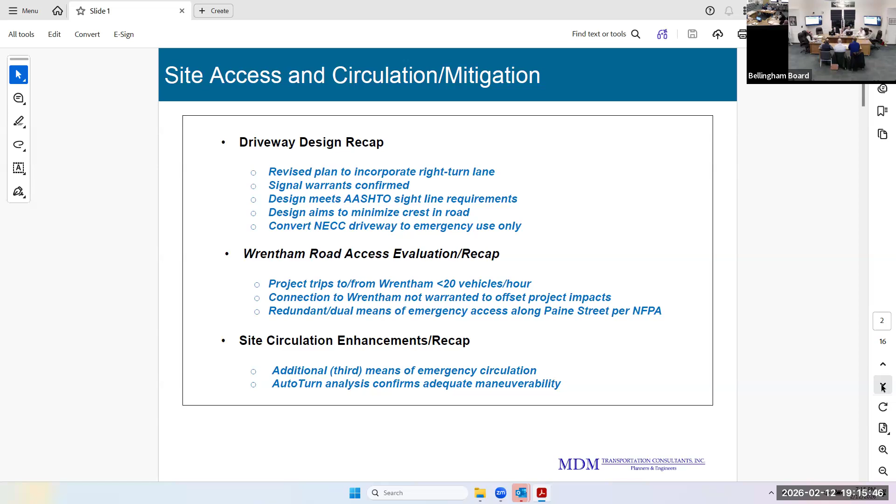So the next slide, starting with the driveway orientation of the board, something I presented last hearing. The driveway at the foot of Paine Street has been modified to introduce a central landscape median and a single exit lane, with the ability to convert that median into a second lane if necessary, subject to monitoring over time as units come online and we can measure the driveway's performance.

That was all done in concert with peer review, which found it to be an appropriate solution and one they endorse. The driveway also incorporates pedestrian elements that allow folks to get into or leave the site with a controlled crossing point, which we presented to the board at the last hearing.

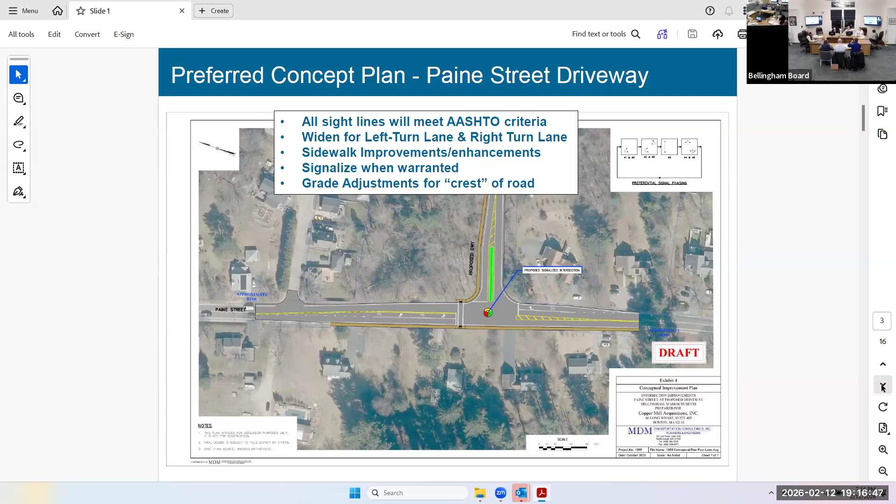The next slide presents some safety-related accommodations for that signal, related to a close review of crash records provided by the police department over an extended period. We have about 5 years of local crash records along Paine Street, and it became apparent that the crashes are occurring at the top of the hill near that curve, all single vehicle crashes between midnight and 5 in the morning. I believe causal factors mainly relate to visibility and driver inattention during those early morning hours.

So some of the features we've proposed, in addition to the location of the driveway and its future signalization, would be the placement of speed advisory signs along the road to help meter speeds. Those types of signs have been shown to reduce travel speeds by about 4 miles an hour, what's known as the 85th percentile travel speed.

In addition, we'd place advanced red-signal-ahead indicators at the top of the hill near that curve, and additional traffic treatments on the road itself, including improved high-visibility pavement markings, chevrons, and other features that enhance the visibility of that corner as you're coming up.

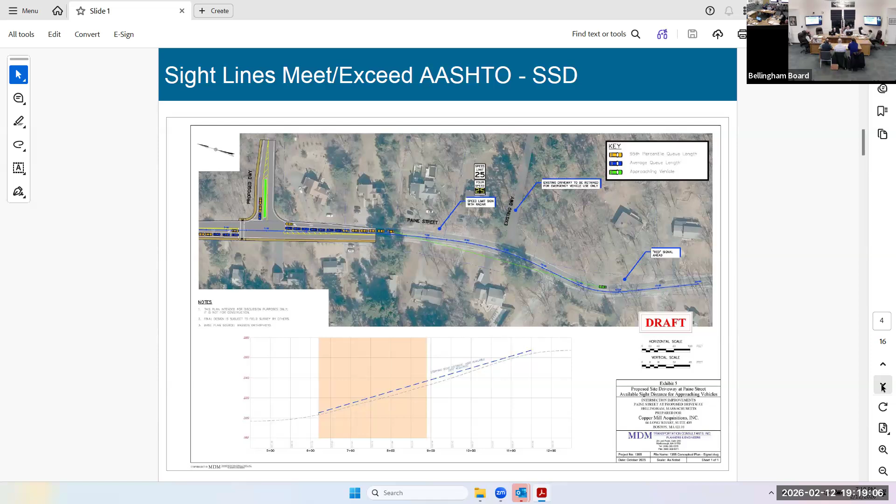The next slide has a lot of detail. I'll point out there's a crest curve along the area where the proposed driveway is to be located. That itself doesn't create a sightline issue per se, but there's the ability to lower it and improve the alignment of the roadway, taking out some of that crest. That's what this shows, again subject to peer review and their concurrence.

So turning our attention from Paine Street to Wrentham Road, we've presented to the board and responded to peer review that the project's reliance on Wrentham Road for trip accommodation is very low. Wrentham Road is not going to be a primary route used by residents of this development. We expect that during traditional peak hours, when volumes are highest, additional trips to or from Wrentham Road will be less than 20.

The vast majority of trips will be on 126, heading south. There will be a limited number that use Wrentham Road, but it won't be a primary route. So there's really not an inherent need for a third driveway from a capacity standpoint.

And as we've presented to the board at the last hearing, there are proposed modifications to the signal that will allow it to function better than it does today, even with the added traffic from this project. There'll be a substantial reduction in vehicle queuing on Paine Street's northbound approach, and the signal will be able to cycle more frequently and efficiently.

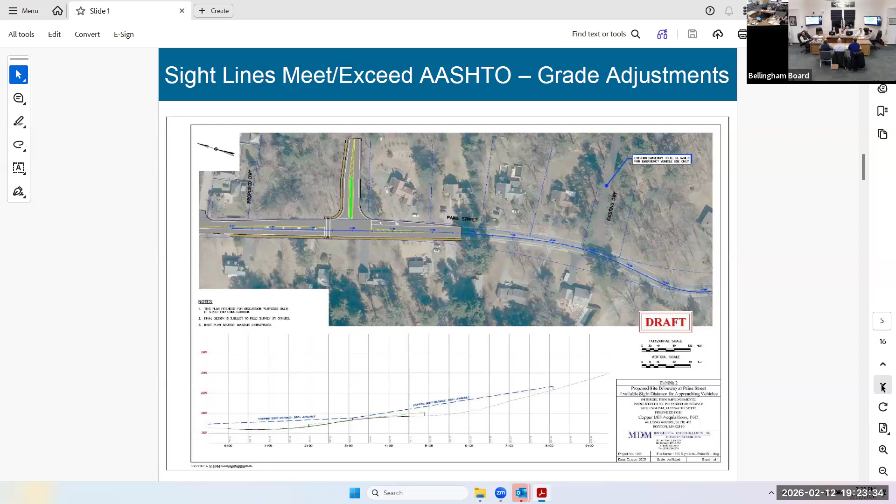We've determined, and I believe peer review has acknowledged, that there are extreme conditions and impacts that would be created by that crossing, and it's not something that is feasible for the project as a result. So the next slide just puts a little closer lens on that. Use the next one, slide after this, Rob.

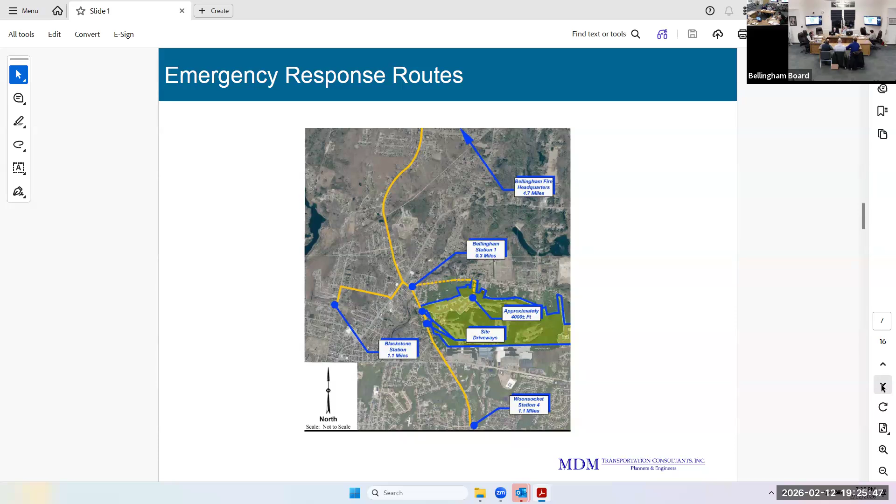So what this shows is that there are stations north, south, and west of this property that would have the ability to get to the site. The first point of what I'd call a gateway to this would be the intersection of Paine and Wrentham Road. That would lead most directly to the two driveways proposed along Paine Street, and less directly along an alternate route that would carry you some 4,000 feet to the north or east to where this potential driveway would be. The next slide shows a little more detail on that.

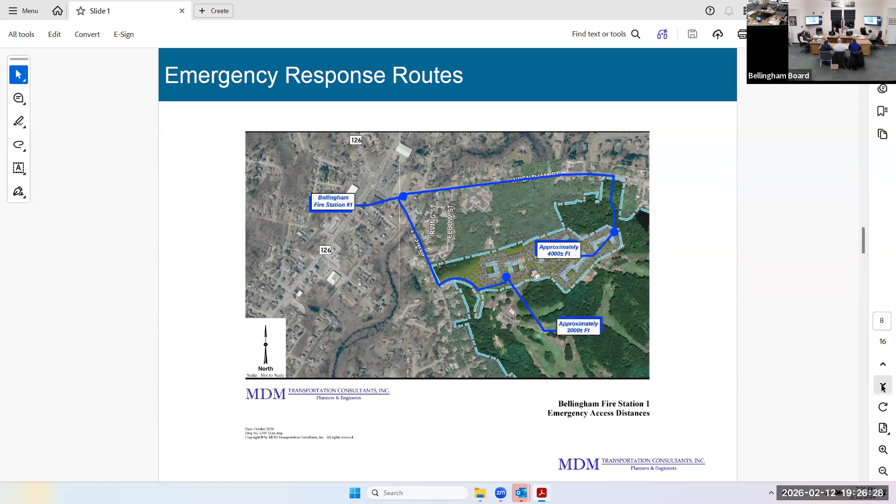Now, the next slide, understanding that we want to enhance the ability as much as possible for fire and emergency response within the property.

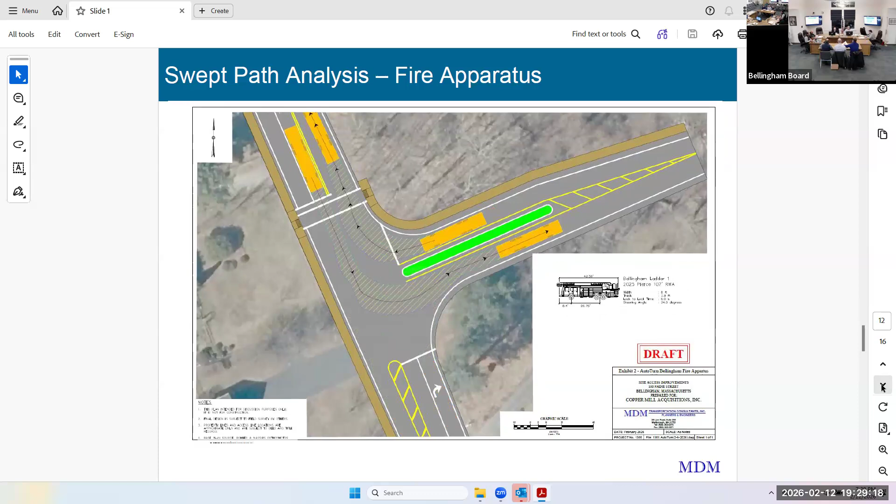So from a response perspective, from a circulation perspective, I think the developer has made strides here to really open up the site and facilitate accessibility for all of the buildings, to the extent emergency response was provided. Understanding that it's just simply not viable to provide a connection from Wrentham Road, based on a very detailed assessment that's been submitted through the peer review process.

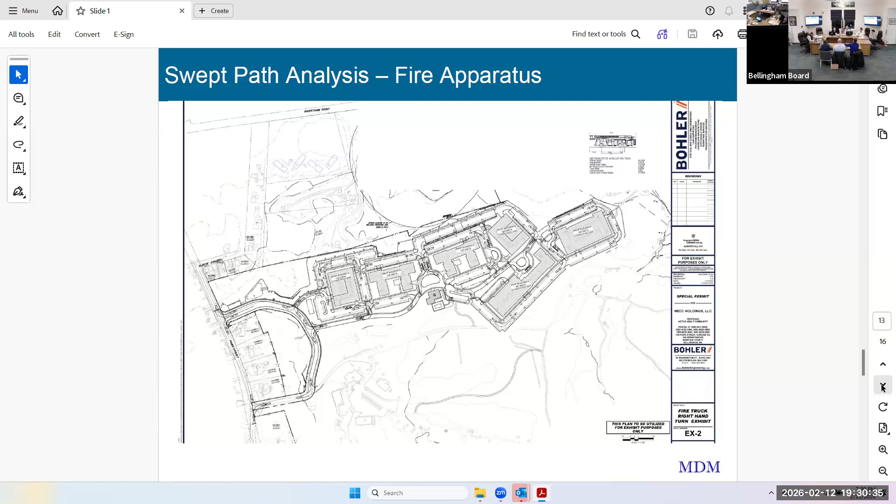And finally, just a recap of mitigation. I've already mentioned some of these, just to the benefit of police and fire. I mentioned the rephasing and optimization of the signal at Pulaski Boulevard, and the implementation of some safety-related improvements, following the completion of a road safety audit. That will be a substantial improvement in capacity and operations.

At Wrentham Road, nearest Fire Station 1, we would enhance the existing 'do not block the box' signage there with physical markings, high reflectivity markings, that make it abundantly clear that anyone who needs to queue on Paine Street on the approach to Pulaski should do so outside of that box.

We have video, we've reviewed literally hours of video for that very location, that indicates that by and large, people do create the gaps that are necessary if they need to queue on Paine Street, to allow folks on Wrentham Road to access Paine Street.

We know that it's not a perfect system, but - could you repeat that one more time? So if you're coming off Wrentham Road, onto Paine Street - yeah, you're saying that basically what the people are allowing or creating gaps in that opening, right?

So if you're approaching the Pulaski signal and there's a long queue that's developing from that signal, which we know happens today, folks who are making turns from Wrentham Road more often than not have the ability to go through that queue because people are allowing that to happen. They're allowing a gap in that traffic. That's consistent with the signs that are there today, which say please don't block the intersection.

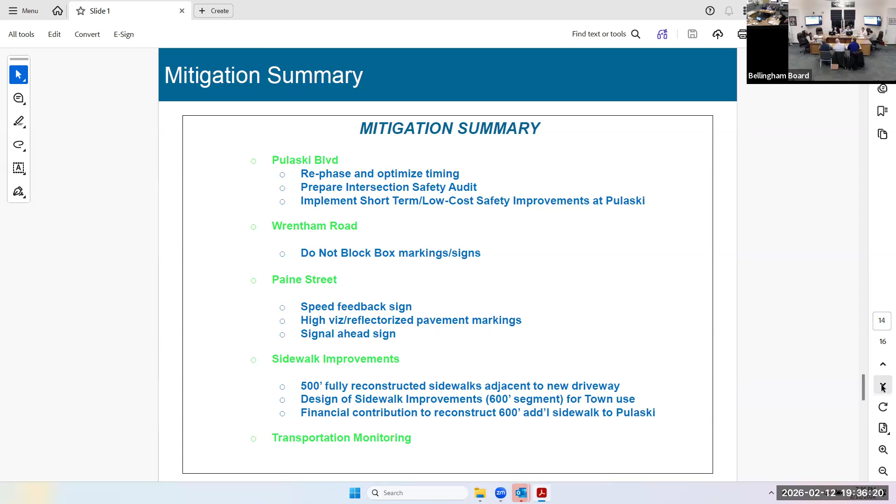The other piece too, we're talking about that intersection. I don't care how you cut it, that intersection is a mess, first thing in the morning and at night. We cannot get out of that station with the current traffic that's there — the way that island is configured, the way our bay doors come out the front, coming out the side. People may read the box, but I've been on that apron when people don't read the box and they park in front of that intersection.

We cannot get out. You're going to be adding another — and no one has told me yet how many more vehicles we're adding. We haven't heard that, or I haven't heard that yet. That's going to, in the morning and at night, add to that additional flow. I'm gonna stop there. I really want to see the plans. I need a set of these revised plans to sit down and review them and add good comments. I'm not gonna just go off the cuff tonight, I'm sorry.

No, I know they've provided some feedback already, so — can we certainly get the chief full sets of plans, just what you have tonight, including the PowerPoints from tonight as well? Yes, I just want to see the updates that we saw tonight. I have the other plans already. I need to see what was presented tonight so I can take time to digest it, go through it, and look at it.

I do have one other question, and I'm not sure who to give this to. So we're talking about the second entrance — the current Paine Street entrance is going to be into the country club, and is going to be an emergency access for us. What is that grade percentage from that upper road down into your project? Is it over 10%?

From which point? The current entrance now into Paine Street, into the country club, where the clubhouse sits. You're talking about a second access road going from that upper country club down into your property. What's that percentage of grade?

On the current plans, it's 10%, and we're going to revise it so that it's compliant with the 8%. 10% we won't accept. Understood. Just want to make that very clear, because our ladder truck is going to get hung up right there.

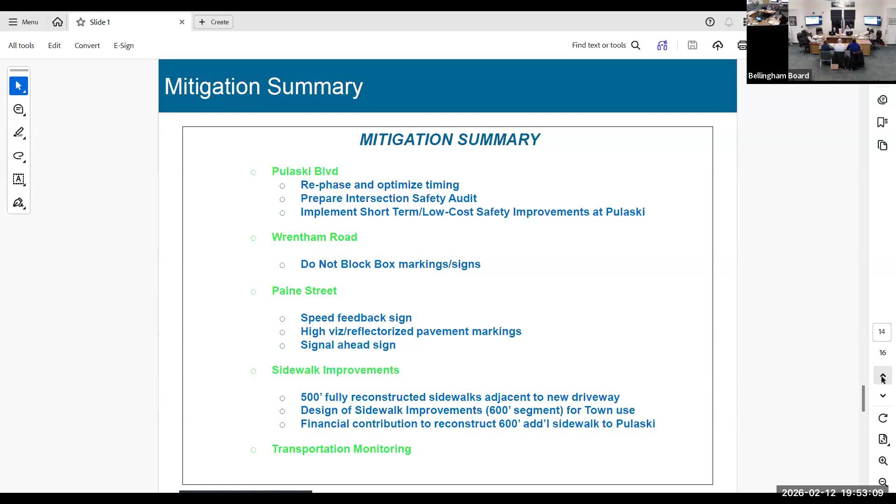What is the slide you'd like, Marty? Slide 9. 9 or 10. This one? Or that one, and then I think it's the one before also. That one? One more, so it might be 7 and 9. Nope, all right, go to 9. That'll answer my question, though, that I can ask.

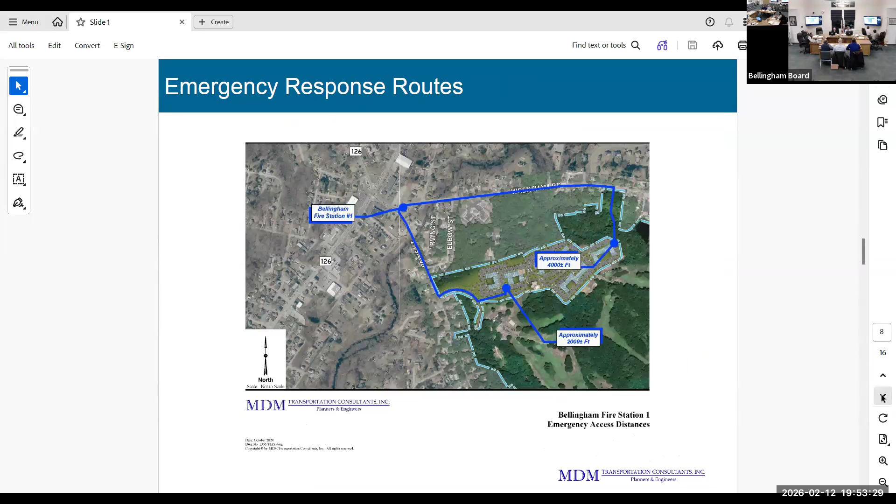So the third egress off of the current entrance, which is going to be an emergency egress only, goes down into this portion here. On the site plans, those are parking spaces, so if a car is there, obviously those parking spots need to go away. Well, first and foremost, what type of gating system are you gonna have for fire and safety? The association I live in right now, we have fire gates, so that's an important factor.

So we have to make sure that's spelled out, and how are we handling the secondary route to get the fire truck, the ladder truck in there - currently the width of that's gonna be a massive turn. And how are we handling starting construction at the bottom of Paine Street, yet the golf course is still in action? How is the phasing, and how are you going to handle that as its entrance to the country club, yet you're then having to develop it as an egress to the property you're building?

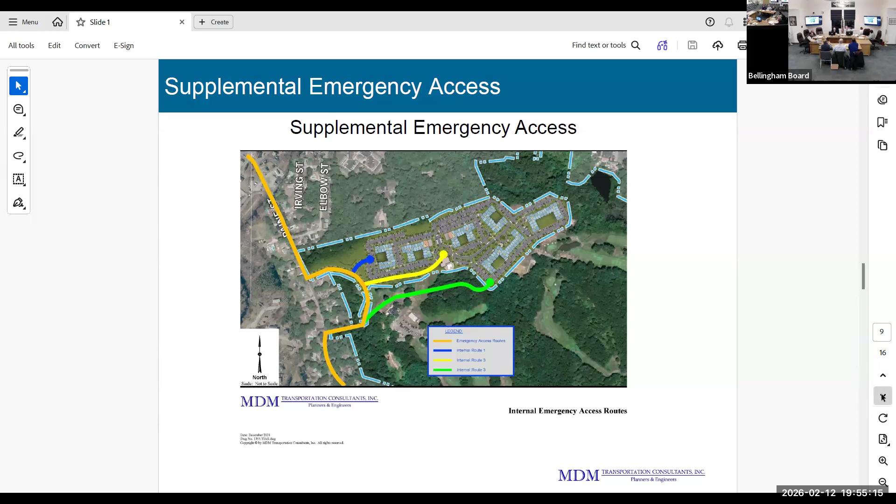There's a few questions in there, so yes - I'll start by indicating that the plan subsequent to this, which is the initial layout that Bohler had done for that third connection... actually it was the prior one, just after this one, if you get it, Dana. That one. You are absolutely correct - there are 3 parking spaces that are impacted by that connection at the end there that would be eliminated. So you correctly point that out.

The grade and construction of this would really convert what is today a cart path of sorts into a 20-foot wide fire access road, right? It would be structurally supported, H20 loading, all of that. The grades on this are relatively flat, certainly less than 5 - it says 4.5%, so it's a pretty good connection. It also provides a direct connection into the aisle next to the building, so there's no need to turn weirdly at the connection point where that fire access road meets that parking field - it literally goes right through.

So let's talk about what leads up to this. The idea would be to have this gated - we wouldn't want it used as general vehicular travel, so the developer would defer to what the fire department would prefer for gate control. It could be a Knox box, it could be an optically programmed arm, it could be a lot of different things. What's the road made out of - is it paved? It's gonna be paved, yeah.

With all suitable sub-base materials for H20 loading, at 20 feet wide it will completely meet all applicable standards for fire access roads. But the gate control on this is subject to whatever the fire department is comfortable with.

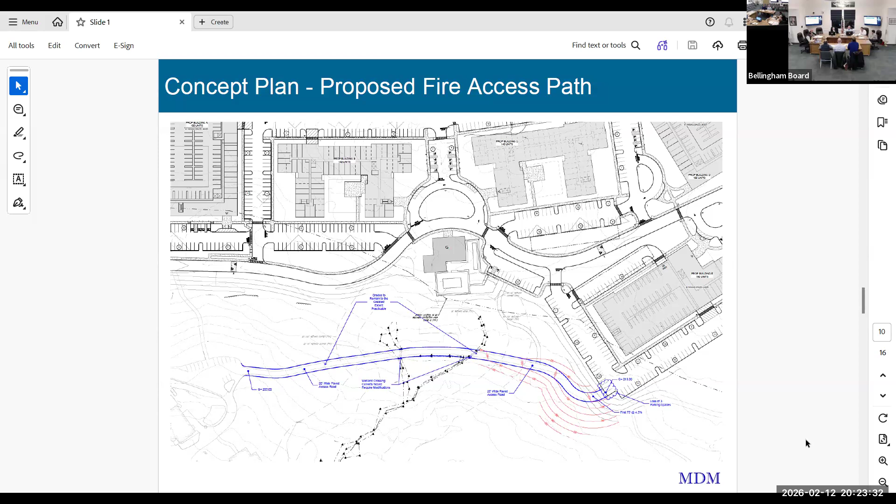One last comment from me before we go to Jesse. The presentation you showed has a sight line from the top of the hill that cuts through all these trees you said are in the public way. I did ask last time for you to provide what you're saying the public way is, and I'm looking forward to seeing that. It's on the plan, so, yeah. Again, in another meeting I would like to go through that in detail. Okay, I think that's fair.

All right, any other things the chiefs would like to bring up today, because we look forward to your input once we've got it. What, if anything, is on the table for sidewalk improvements here? We also heard about pedestrian access, but the sidewalks along Paine Street are probably not up to current code or compliance. So with the signal, it seems like there's going to be some sort of crosswalk situation, but where does that lead? Are we talking new crosswalks up and down Paine Street? New sidewalks? I don't know where that lands in terms of what's being proposed, offered, or required.

Do you have the picture from last time? Yeah, it was on here, slide 14 I think. Not the sidewalks, at the intersection, yes, one of the drawings did show that. The larger context of the sidewalks was covered at the last hearing, so let me explain it through the chair, briefly.

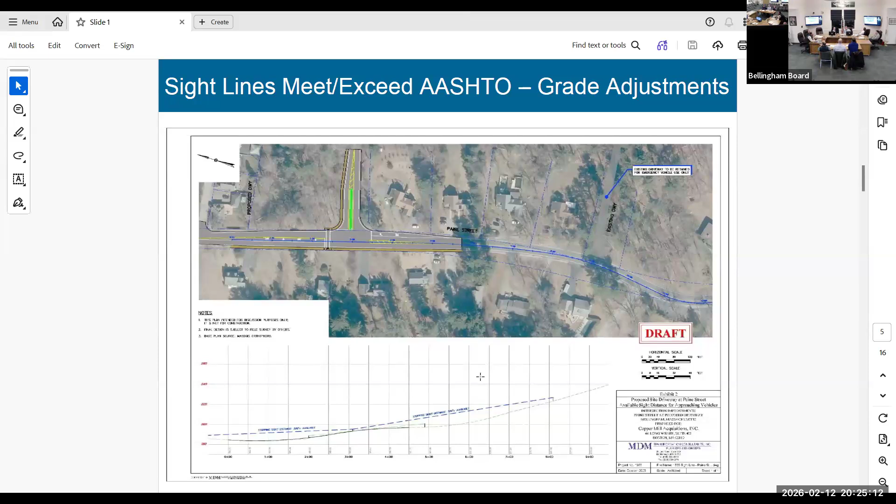There'll be 500 linear feet of brand new sidewalk near that new intersection driveway, and working south on Pulaski Boulevard there's new sidewalk as well. There's a gap of about 600 feet of sidewalk that is most likely substandard in some way, might not be wide enough, or there might be a telephone pole in the middle of it. What we've indicated to the board is that the developer would make a financial contribution to the town for purposes of designing and implementing an improved sidewalk in that section. The issue is that, along the road, there are portions of the sidewalk that, although they'd like to be wider than they are today, may actually encroach on private property. That type of widening is beyond the ability of a private interest to do—it has to be a municipal project. The municipality has certain rights to make improvements even if it affects private property.

So that is the structure and nature of the conversation. Everyone wants to have nice sidewalks out here. What the developer can do is what's shown in this color plan: the 500 linear feet of brand new sidewalk and the new crossing, which will be signal controlled—push button activated, so if someone needs to cross they push the button. It's that gap that would really need to be addressed separately.

May I, for just a second? Go ahead. In your last slide deck there was one concept that did a really good job of showing new and proposed sidewalks. Can you just send that one thing to me? Sure, yeah. Not right now. Yeah, you can find it.

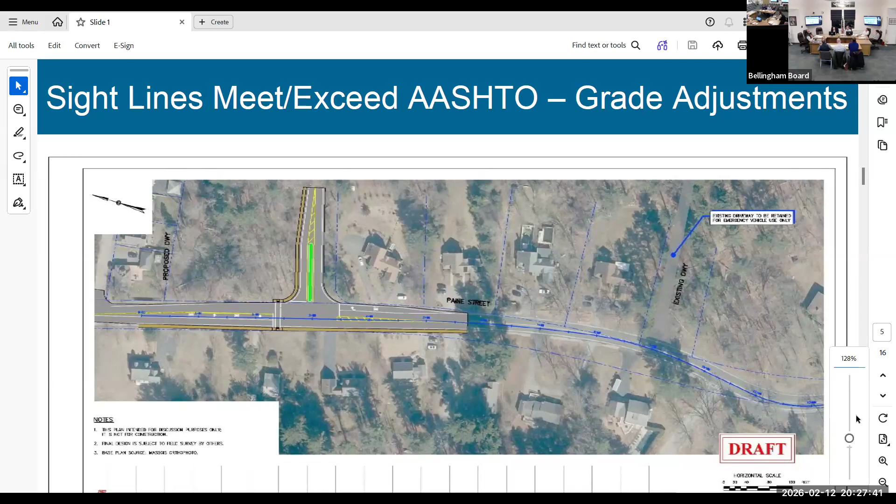I think we should probably go to Jesse unless there are any other concerns from the board. Does the Chiefs have any other comments? Chiefs, I'm also thinking. All right, Jesse, the floor is yours. Excellent, thank you very much. Appreciate everybody's time tonight.

Want to take a little bit of time to talk about some of the impacts that we anticipate with the development or the project of this size, this magnitude.

Kicking off with water, we consulted with our team at Beta to update our existing water model to determine available fire flows and system pressures. We use a standard of 110 gallons per day per bedroom, looking at about 132,000 gallons per day as our estimate. Translation, that's about 92 gallons per minute.

With this, we looked at a couple of different scenarios, the first being a single entrance for the water supply, and scenario 2 a looped water system, both requiring upsizing of the existing 6-inch cast iron water main along Paine Street to a minimum of 8-inch. All of these flows were based on the existing 103 psi currently available.

Our comment was a preference to upsize the water main along Paine Street additionally to a 10-inch to provide future capacity in the event it's necessary. Obviously, a development or project of this size, we need to make sure we can provide adequate pressure, capacity, and fire flows, also drinking water supply.

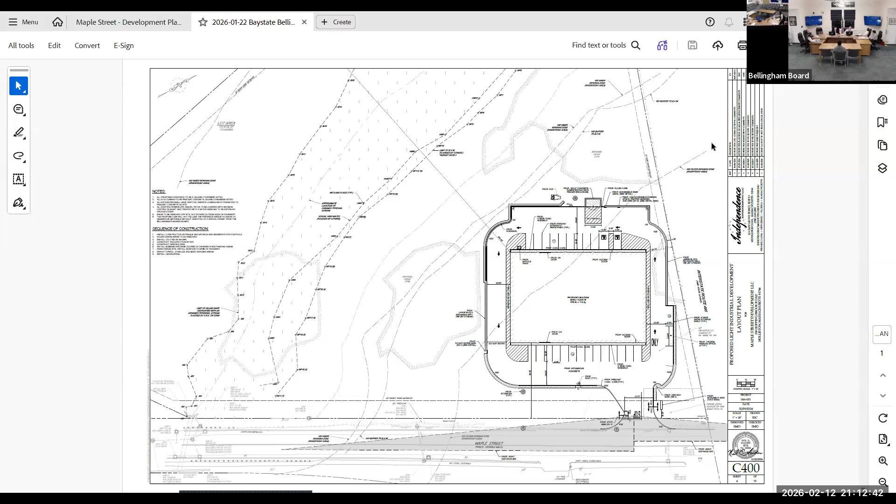There was parking in front of the building and behind the building. So there was parking in front and behind, and one thing that needed to be done with this, because the site was pretty limited in size, and this is pretty common, Chief, there's a truck turn analysis that I'll be putting up too.

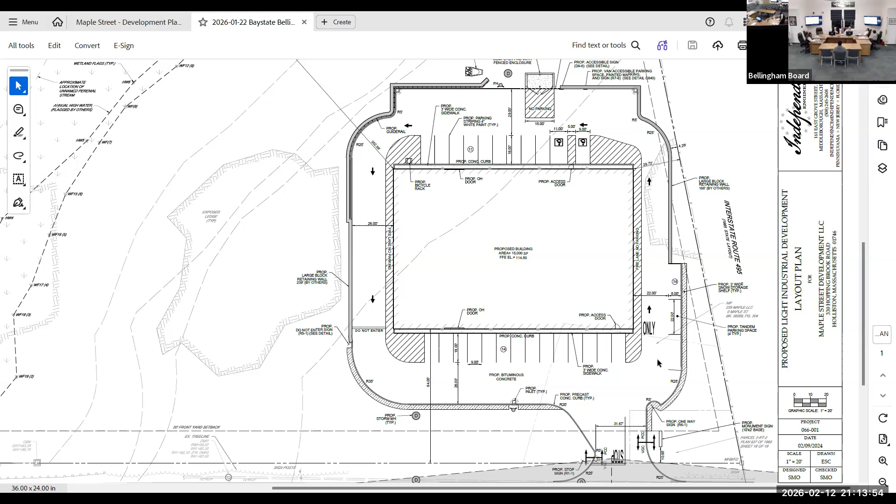So that was the first thing. And then the other item too, because I know Chief Miller, I'm sure you're very interested to know how circulation is around the building.

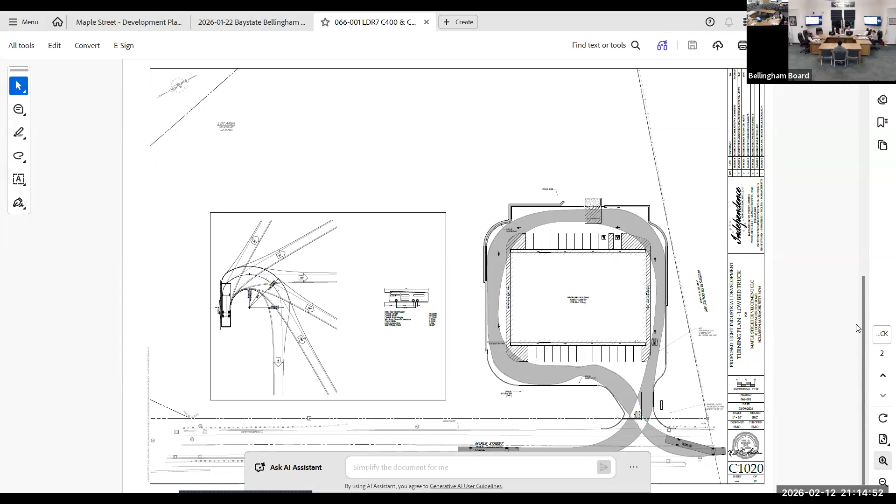This is not the right one. So this is with the low bed trailer, which is much larger, Chief, and you'll see the dimensions of the fire truck. If I can share my screen. I am really struggling, I am so sorry. What was that? First time with the computer. Yes, ooh wow, excuse me, that was public. I'll pay for that tomorrow. He doesn't care, I'll pay for that tomorrow.

So the truck turn analysis you can see on the right-hand side is the low bed trailer that would be trucking in the equipment, which it fits around. This one doesn't show the parking on the side here, but that won't be affected. And then you can see here the outline and the dimensions for the fire truck that was used in the initial submission, which is much, much smaller than the low bed trailer. So this is the information that was submitted as part of this modification request.

So essentially, I don't know if the board wants any additional information. Essentially, you need to make a determination if this is a major or minor modification. And then if it's major, it would require a public hearing. If it's minor, you can make a determination tonight. If you need more information, ask away.

Any questions from the board? Yeah, just because I wasn't here at this, I remember it going on because I watched a lot of these from Zoom. I know the concern from the 495 entrance there, was there a consideration to have it on this side? Yeah, there was. The issue is the grades. It starts sinking quickly here, was that the concern? Correct. So it would be a pretty significant grade in the driveway if you accessed from there.

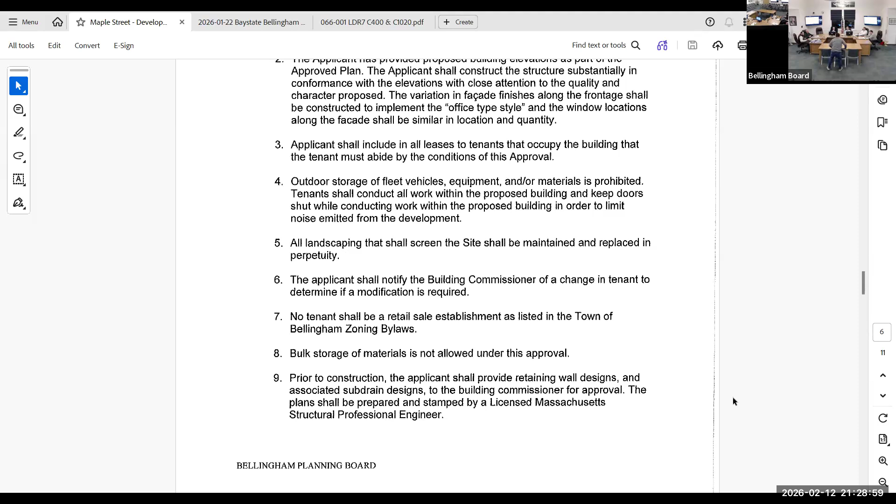All right, okay, perfect. So, okay, good. All right, sounds good. Thank you, Nick. No problem. Yes, thank you. Thanks, guys. All right, so that's that. Thanks, Dave. Good night, everybody. Good night, Chief. Have a good night, Steve.

So the next thing, Ernie, welcome. I hope you had extra coffee tonight. I'm wide alert, I'm ready to go. We've gone to midnight before, so. Yeah, no, it's still way under the line. We're way under the line. Welcome, yeah, well, we're gonna push it to midnight tonight, I'm just kidding.

So I'll give a quick update on what this is about and hand it over to Ernie. Ernie is the developer who acquired the North and Blackstone Street townhouse project. If you've driven down there, that was approved back in 2023. Ernie's been working on that construction and it's come together quite well, right, Ernie? Yes. So part of that special permit required inclusionary housing. We have a 10% requirement and that requires a special permit through the planning board. Now Ernie's working to get the information to the state, because I believe it's Mass Housing that gets the application.

We have the information associated with the special permit that I'll share. But really, I think the big discussion tonight, and Ernie, correct me if I'm wrong, is that typically when we've looked at these sites, usually, and actually per our requirements, there's a clause that you have to distribute the inclusionary units in line with how the units as a whole are distributed on the site. What that comes down to is, if there's a triplex development, usually you want a mixture of end and middle units as inclusionary. Ernie is requesting, which I'm pulling up the plan that was submitted, two middle units, which isn't exactly in line with what the board has approved in the past. So I think in order to get the application to the state, he just wants verification to see if this could work with the two middle units or if it makes sense to do middle and end.

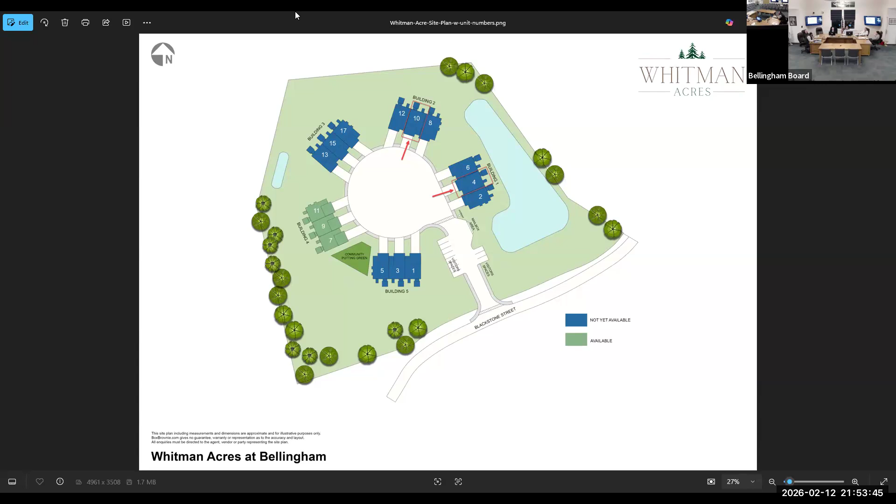Can we have a show of hands if you're okay with the middle unit? Okay, and that's the case then, we're good. All right, Ernie? Okay, awesome, thank you. All right, thank you, sir. Thanks, Ernie, have a good evening. Take care, bye-bye.